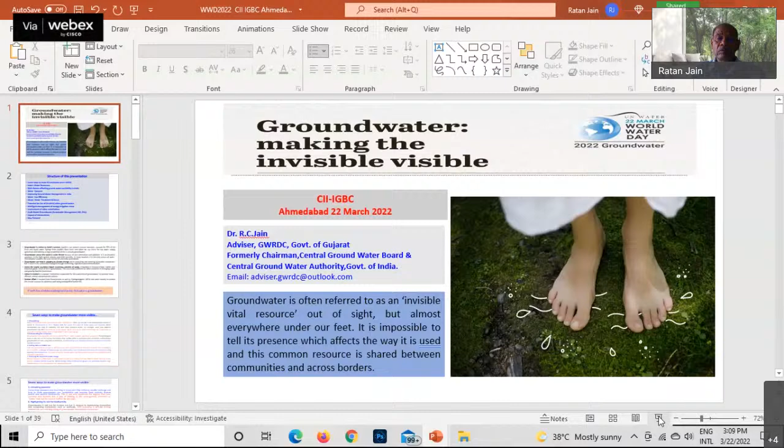Good afternoon, everyone. As already introduced by the previous speakers, I will start right now with the presentation. Groundwater is often referred to as an invisible, vital resource, out of sight but almost everywhere under our feet. As you can see in the headlining picture, it is impossible to tell its presence, which affects the way it is used, and this common resource is shared between communities and across borders.

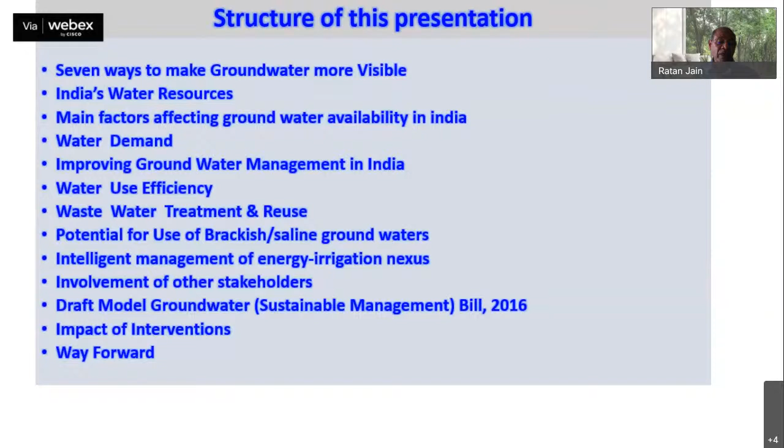The structure of my presentation is like this. I'll be sharing my insights into the following aspects: 7 ways to make groundwater more visible, India's water resources, main factors affecting groundwater availability in India, water demand, improving groundwater management, water use efficiency, wastewater treatment, potential use of brackish saline groundwater resources, intelligent management of energy-irrigation nexus, involvement of other stakeholders, the groundwater management bill, impact of the interventions, and the way forward.

As all of you know, groundwater is critical to the Earth's survival. Aquifers, our planet's natural reservoirs, account for 99% of the fresh liquid water. Springs from aquifers feed the rivers, and we use these for our water supply, with a large proportion also going to the agricultural industry.

Groundwater across the world is under threat because of over-abstraction and pollution. It is an essential supporter in the fight against poverty and child mortality. In many locations, it is the only source of water. Groundwater supports the very survival of vulnerable populations. It can help in adapting to climate change and in protecting and restoring vulnerable ecosystems, but it needs to be sustainably managed through monitoring, regulation, and communication.

Across the world, countries import enormous volumes of water embedded in imported food, clothes, and industrial goods. With much of this being groundwater, this can create problems for other countries in managing water and growing food for themselves. Action is needed to empower institutions responsible for protection of groundwater to promote more efficient, ethical, and democratic policies. Greater effort is needed from governments as well as hydrogeologists, NGOs, and wider society to protect this crucial resource for planetary well-being and dignified human life. So, if Earth has a hidden underground pulse, the pulse is groundwater.

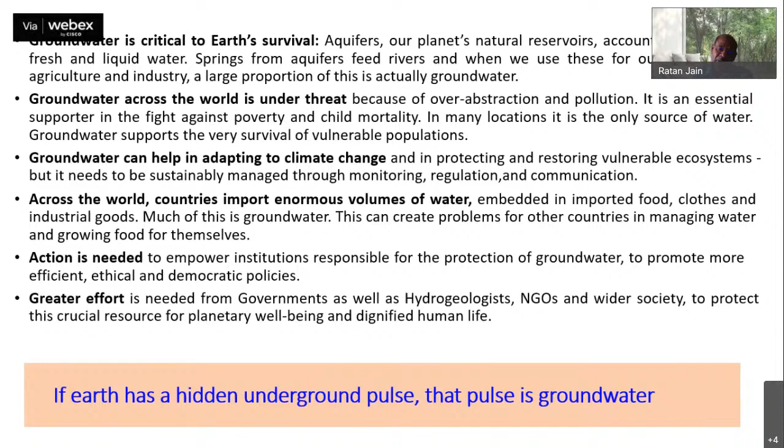As the subject of World Water Day goes, making the invisible visible means making groundwater visible. There are 7 ways to make groundwater visible. Number 1, and the most important, is demystifying. Being underground makes groundwater seem mysterious. What we can see is the infrastructure needed to extract it on the ground, but not the groundwater itself. It is not a flowing river, but water that exists in cracks, pores, and fractures of the sediments.

Better visualization can help to demystify and bust some common myths. For example, what does polluted groundwater look like? It is no different than clear water. Similarly, groundwater is not always pure and can be unfit for drinking due to the presence of naturally occurring arsenic, fluoride, nitrate, or uranium, which is impossible to see or photograph.

The second aspect is understanding the complexity, because groundwater is the resource and the aquifer is the host, both of which need to be protected. The hydrological cycle is only one of the factors that affects how quickly water is recharged after extraction. Contaminated groundwater can take a long time to remediate, and understanding such complex processes can help us value this invisible resource. Getting data on the hidden use, the lack of understanding and data on who uses how much groundwater, for what, and at which time, is missing in most countries, including India.

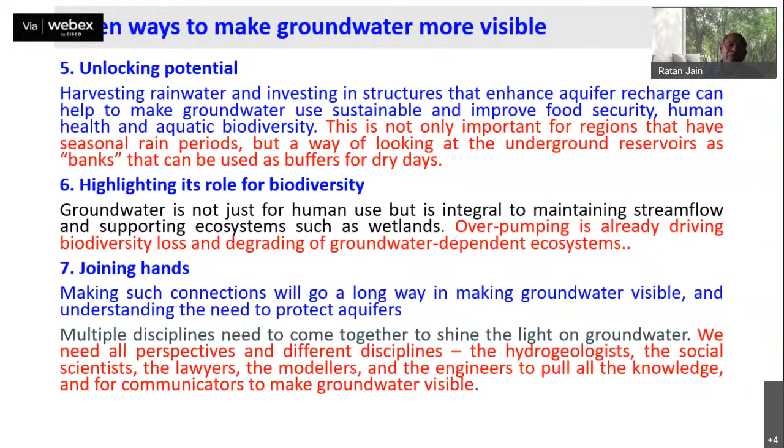Now let us have a look at the situation in India. We in India have nearly 17.5% of the global population, with only 4% of the freshwater resources of the world.

In India, we receive about 4,000 billion cubic meters of precipitation, including snowfall, but the average annual potential in the rivers and aquifers is only of the order of about 1,900 billion cubic meters. That makes less than 50% of the total precipitation received, mostly because of evaporation losses.

Out of this 1,870 BCM, the utilizable water is estimated to be around 1,120 BCM, of which surface water makes about 690 billion cubic meters and groundwater about 430 billion cubic meters.

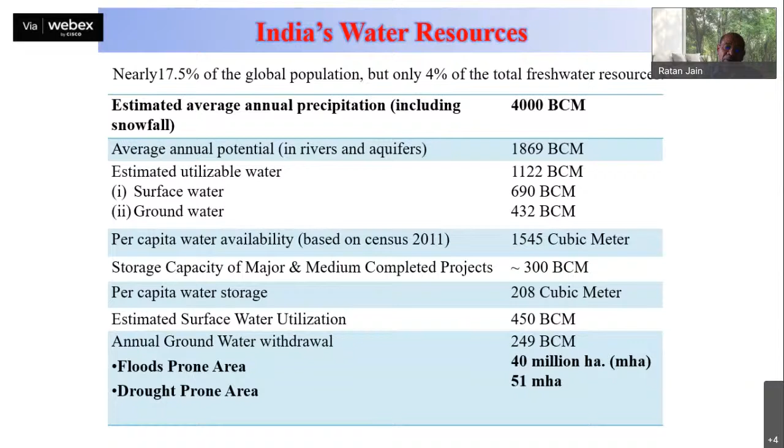The per capita availability as of 2011 was 1,545 cubic meters per capita per year, which is decreasing. The per capita water storage in the country is about 208 cubic meters per capita, with surface water and groundwater utilization being about 450 and 250 BCM respectively.

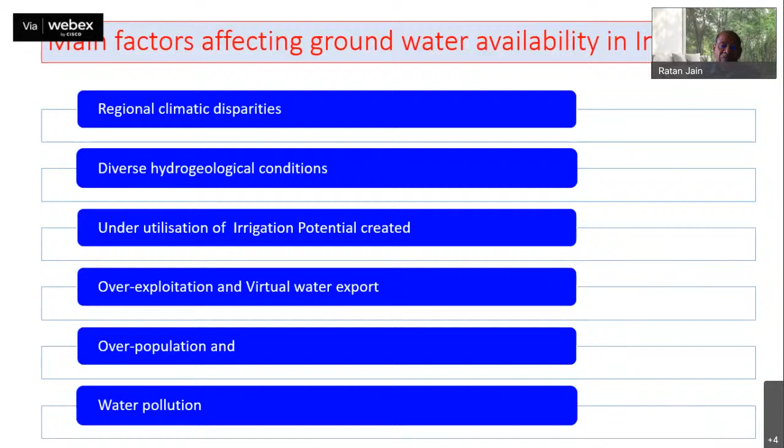Now let us look at the main factors affecting groundwater availability in India. These are regional climatic disparities, diverse hydrogeological conditions, underutilization of the irrigation potential created, overexploitation, virtual water export, overpopulation, and water pollution.

As I've already said, we are able to utilize something like 60% of the water in India because of topographic constraints and distribution effects. Further, changes in temperature and precipitation also affect regional water resources and flood risk, exacerbating regional disparities in water availability across the country.

India receives about 115 centimeters of rainfall on average, but with very spatial variations. A major part of this rainfall, nearly 75%, is received during the southwest monsoon season, confined to the 4 months June to September. Tamil Nadu mostly receives its rains during October to December, and the 3 states of Jammu & Kashmir, Himachal Pradesh, and Uttarakhand receive rainfall in all 4 seasons.

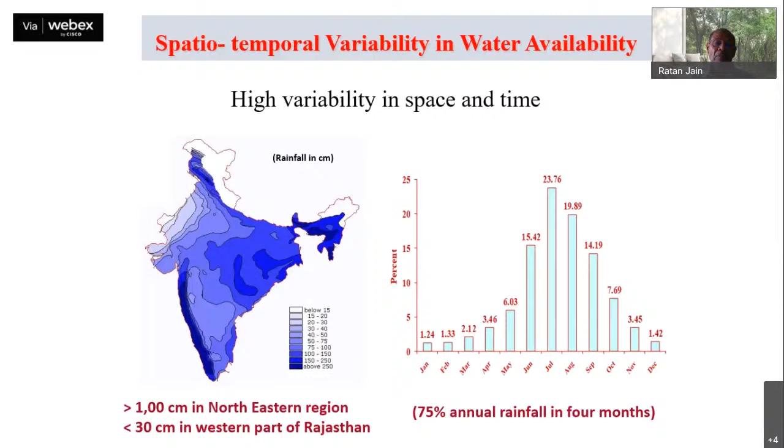Then there is diverse hydrogeological conditions. The geology is basically forming the reservoir for storage of water. The geological formations are the reservoir host rocks, and there is a lot of variation across the country. There are about 14 principal aquifer systems in India based on the major geological formations.

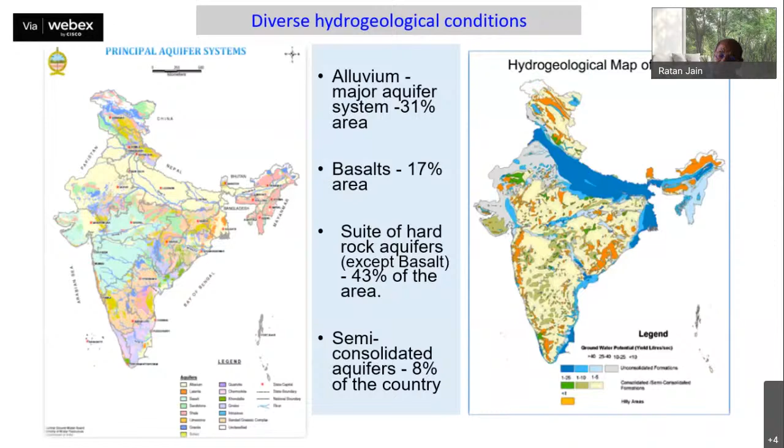The third issue is overexploitation. We are exploiting groundwater more than the combined withdrawal of United States plus China together. Our extraction is of the order of about 250 billion cubic meters per year. This overexploitation is mostly concentrated in the western and northwestern part of the country, in Punjab, Haryana, Rajasthan, where the rainfall is comparatively less, but indiscriminate withdrawal has taken place.

In the western part of the country, in Rajasthan and Gujarat, because of the arid climate, groundwater recharge itself is limited, leading to stress on resources. In the southern part of the peninsula, including parts of Karnataka, Andhra, Telangana, and Tamil Nadu, due to inherent aquifer properties of the crystalline rocks, groundwater availability is low. We have something like 20 million wells extracting groundwater with free and subsidized power supply, and about 90% of the extracted groundwater is consumed by the agriculture sector.

Looking to the distribution and stage of development in the country, this assessment has been carried out jointly by the Central Groundwater Board and the state groundwater departments. There are 6,965 administrative units in the country, also called assessment units, coterminous with the talukas or blocks of the respective states.

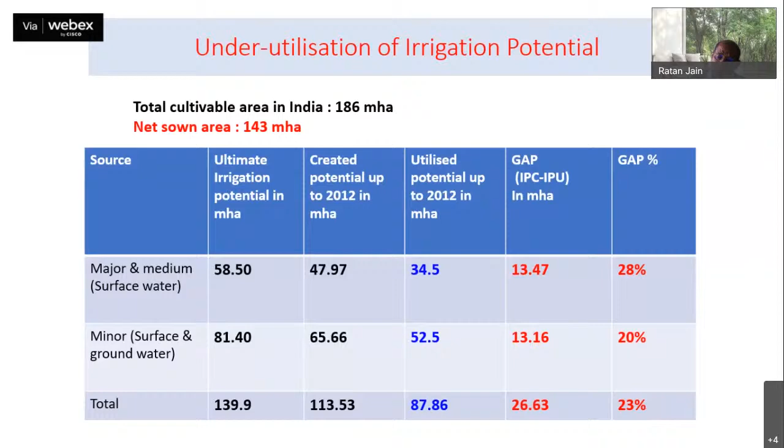Now, virtual water export is one of the very difficult things which have been happening for certain reasons. India is reportedly the top net exporter of virtual water, exporting about 100 billion cubic meters of fresh water through crops, animal and industrial products. This does not look huge, but extraction is highly localized, especially in northwestern India, through crop production. This probably also does not include water rendered unusable through contamination during production of crops and rearing of animals for industrial products. A country deficit in water resources cannot afford to export it unless the water footprint is significantly reduced.

For example, the export of rice from India. India produced about 160 million metric tons during 2018-19 and exported about 12 million metric tons. If we consider the water footprint of rice to be about 3,500 liters per kilogram, the water exported is approximately 42 billion cubic meters. The water footprint of the rice exported alone accounts for about 36% of the total groundwater extraction of the top 5 rice producing states: West Bengal, UP, AP, Punjab, and Tamil Nadu. A similar story holds true for sugar, cotton products, and cotton machinery.

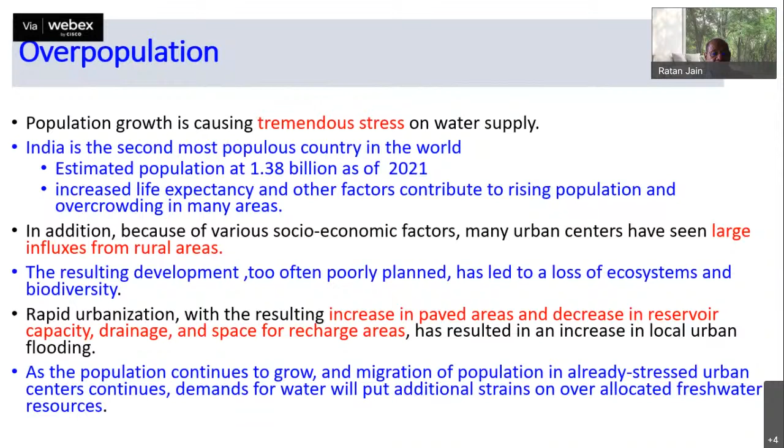The resulting development too often is poorly planned, which has led to loss of ecosystems and biodiversity. This rapid urbanization is also causing an increase in paved areas and a decrease in reservoir capacity, drainage, and space for recharge areas, ultimately resulting in an increase in local urban flooding. As population continues to grow and migration into already stressed urban centers continues, demand for water will put additional strains on the over-allocated water resources.

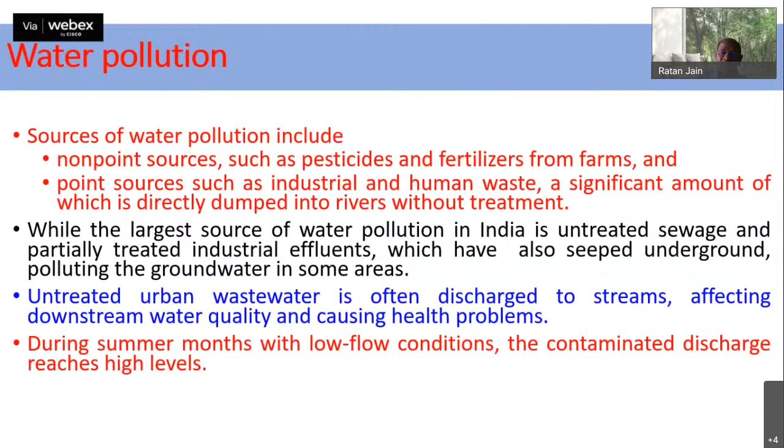Then water pollution. Water pollution is basically of two kinds: it can be classified as non-point sources, such as pesticides and fertilizers, and point sources from industries and human waste, a significant amount of which is directly dumped into rivers without treatment. The largest sources of water pollution in India are untreated sewage and industrial effluents, which have also seeped underground, causing groundwater pollution. Untreated urban wastewater is often discharged into streams, affecting downstream water quality and causing health problems. During summer months, with low flow conditions, the contaminated discharge reaches high levels.

So these are basically the factors responsible for causing shortage or scarcity of water. Now, if we look at the total water demand scenario in the country for various sectors including irrigation, drinking, industry, energy, and others, as per estimates made by the National Commission on Integrated Water Resources Development, water demand is likely to increase to 843 BCM in the year 2025 and to 1180 BCM in the year 2050, wherein we will already exceed the average annual availability of 1123 BCM in the country.

So now what can be done to improve the management, more specifically the groundwater management, in India? Presently, water management remains heavily dominated by traditional built infrastructure, that is grey infrastructure. But the enormous potential of working with nature remains underused in India. A paradigm shift is required in management approaches towards water shortage challenges in India, progressively increasing the use of nature-based solutions across all sectors, including water needed for agriculture, sustainable cities, disaster risk reduction, and water quality.

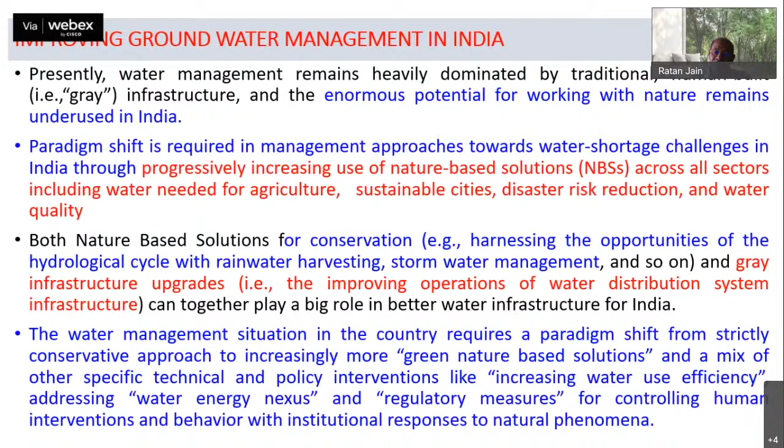So both nature-based solutions for conservation, that is harnessing opportunities of the hydrological cycle like rainwater harvesting and stormwater management, and grey infrastructure upgrades that improve the operations of water distribution system infrastructure, can together play a big role in better water infrastructure for India. The water management situation in the country requires a paradigm shift from a strictly conservative approach of grey infrastructure creation to increasingly more green, nature-based solutions, along with a mix of other specific technical and policy interventions, like increasing water use efficiency, addressing the water-energy nexus, and regulatory measures for controlling interventions and behavior with institutional responses to natural phenomena: the nature-based solution for water security and resilience.

This has gained a lot of significance during the last few years, and the dialogue on water and environment has significantly shifted, in which the environment cannot only be conserved but managed to meet human needs sustainably, with a focus on working with nature to produce co-benefits for both people and nature. In this dialogue, nature-based solutions for water have contributed importantly.

The option of building more surface water reservoirs is increasingly limited by uncertain precipitation, reservoir siltation, environmental concerns, and the fact that most of the cost-effective and viable sites have already been used up. In addition, increasing temperature also leads to increased water losses through evaporation.

So as part of this shift, groundwater and the subsurface environments that contain it, that is the aquifers, are increasingly seen as strategic and integral resources for enhancing water supplies and other natural ecosystem services that support human development and resilience. Hence it is increasingly important to enhance, manage, and sustain services derived from the nature-based infrastructure of aquifers through managed aquifer recharge, by managing and optimizing underground water storage towards resilience in dry periods or seasons of uncertain and variable climate.

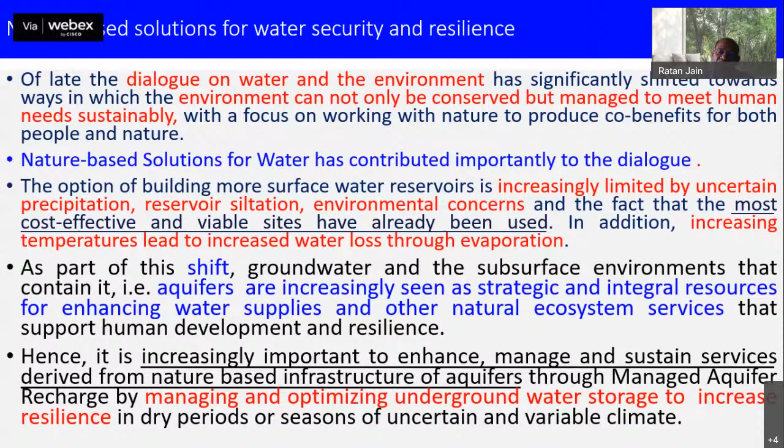The green infrastructure approach uses natural processes to enhance water availability. There is soil moisture retention, artificial groundwater recharge, improved water quality through natural and constructed wetlands, riparian buffer strips, and reduced risks associated with water-related disasters and climate change. For example, floodplain restoration, green roofs, etc.

The green infrastructure expands the low-impact development approach to a larger community scale and presents similar sustainable opportunities to local government and user projects for implementation at the lower levels of administration as well. To develop a sustainable water supply chain in India, the green infrastructure approach can substitute, augment, or work in parallel with grey infrastructure in a cost-effective manner.

So both the nature-based solutions for conservation, harnessing the opportunities of the hydrological cycle, rainwater harvesting, storm management, etc., and grey infrastructure upgrades, improving operations of water distribution infrastructure, can together play a big role in better water infrastructure for India. The nature-based solutions mainly address water supply through managing precipitation, humidity, storage, infiltration, and transmission, so that improvements are made in the location and quantity of water available for human needs.

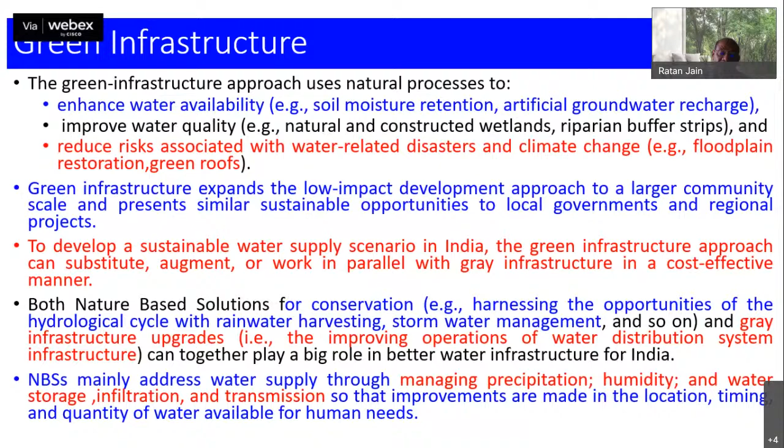To look at the opportunity of managed aquifer recharge, the Central Groundwater Board has carried out studies to demarcate areas suitable for artificial recharge in the country. That is, those areas where the depth of water level is more than 3 to 8 meters below ground level, with a declining trend of water level over the last few years, and areas with water quality deterioration.

About 11 lakh square kilometers of area has been identified in the country, and about 185 BCM of non-committed surplus water has also been estimated as available for recharge. Recharging this water can augment our groundwater resources by 130 million cubic meters at an estimated cost of 1,33,145 lakh rupees, that is crores of rupees.

The grey infrastructure exists as the management practices for irrigation projects. So the most important thing is to close the gap between irrigation potential created and utilized, through farmer participatory command area development work.

This can be done through aggressive promotion of participatory irrigation management through water users' associations at the outlet and distributory level. But we need to establish a minimum irrigation service fee at a reasonable level, and at least 50% of that should be provided to the WUAs for maintenance and distribution of the system. In addition, enhancing the resources available to major and medium irrigation departments for improving operation and maintenance of irrigation systems.

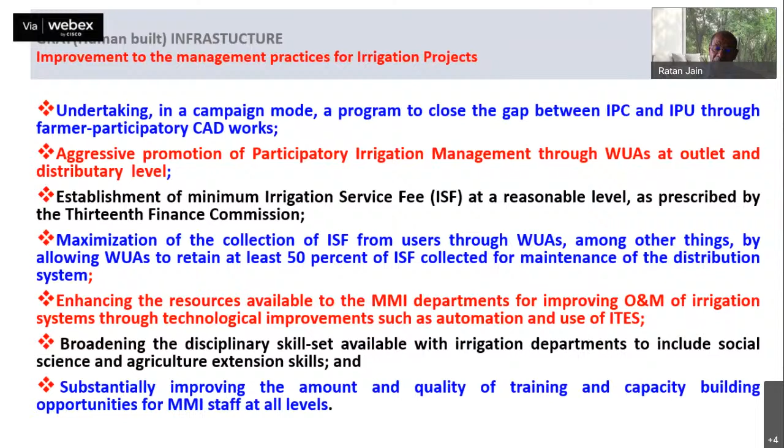Now if you look at water use efficiency, this table shows how much efficiency is achievable and how much is the present level of efficiency. In case of irrigation, the present level of efficiency is about 30%, while fully achievable is around 60%. So there is scope to increase efficiency by another 30%, or rather 100% of the current 30%. The quantum of water likely to be saved at full efficiency level will be about 100 billion cubic meters. If we are able to increase efficiency only by 20%, then also we save something like 70 BCM of water.

Same case with groundwater: the efficiency is about 55%, but we can achieve up to 75%. There is a scope for 20% increase, providing about 45 BCM of additional water resources.

In the drinking water sector also, about 10 BCM can be saved and the efficiency can be increased from 60 to 90%. In case of rural water supply also, it is possible to increase efficiency. So we can see that if water use efficiency in India is increased to the fully achievable level, we are able to generate another 166 BCM of water from the waters already utilized. And if we are able to achieve only a 20% increase, we are able to save 130 BCM of water, which is adequate to meet irrigation and drinking water requirements up to the year 2050.

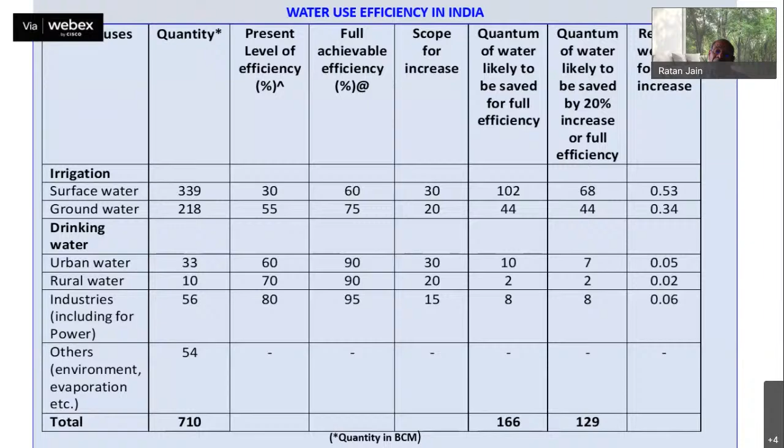Now, why do we talk of water use efficiency in the irrigation sector? Because we consume nearly 90% of all the groundwater found in the country for agriculture, and also about 50% of the canal water supplies. Traditional irrigation techniques like flooding the fields result in water losses from evaporation, drainage, percolation, conveyance, and excessive use. Potential solutions include educating farmers on best practices of micro and drip irrigation and precision irrigation. This will help save anything between 30 to 40% of the water resources applied for irrigation. For example, with a 10% increase in water use efficiency in irrigation projects, an additional 14 million hectares can be brought under irrigation from existing capacity.

As per the estimates of the Central Water Commission, National Water Mission, about 112 BCM of water could be saved by a 20% increase in efficiency, and there could be additional demand for irrigated agriculture, as I said, up to the year 2050.

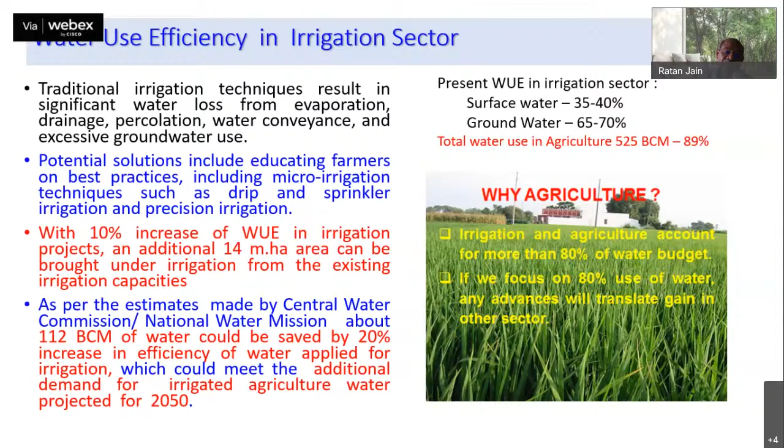Then non-revenue water. This is also a very severe constraint on water resources, and a lot of saving is possible. The amount of non-revenue water is high in India for several reasons, including advanced system age, poor maintenance, illegal connections, leakages, and lack of proper mapping. The average non-revenue water in India is almost 32%. In some Indian cities, it makes up even 50% of the water produced. The major determinants of water utility's successful performance are mainly the lack of meter connections and the extent of distribution networks with inadequate pumping facilities.

It is estimated that a typical Indian water utility has the potential to improve water pumping system efficiency by 25%, thereby increasing supply reliability. Further, better water accounting would support more economically viable water markets for an already stressed water sector, and to this end, the creation of a robust water accounting framework is integral to better water policies for India. By contrast, policies such as providing free electricity to farmers or financial support for groundwater extraction have resulted in uncontrolled exploitation and waste of water resources.

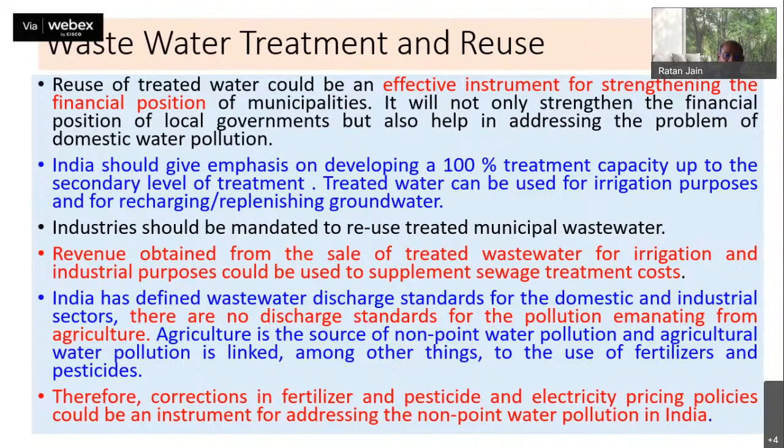India has not defined discharge standards for pollution emanating from agriculture, so that also needs to be defined. Corrections in fertilizer, pesticide, and electricity pricing would be an instrument for addressing non-point water pollution in India.

Then we have huge water resources of brackish and saline groundwater of 1164 BCM in Haryana, Punjab, Delhi, Rajasthan, Gujarat, Uttar Pradesh, Karnataka, and Tamil Nadu. This water can be utilized for many salt tolerant varieties of crops, vegetables, and fruit plants like barley, dates, and pomegranate. When these crops are irrigated with saline or brackish water, the yields are not significantly affected.

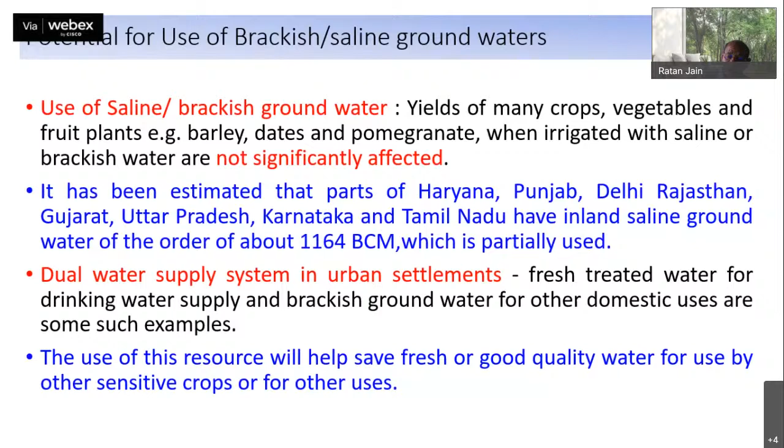Similarly, dual water supply systems can be introduced in settlements, wherein we can provide fresh treated water for drinking purposes only and brackish groundwater for other domestic uses like toilet flushing, wash basins, and providing water for lawns, etc. The use of this resource will help save fresh or good quality water for use by other sensitive crops or for other purposes.

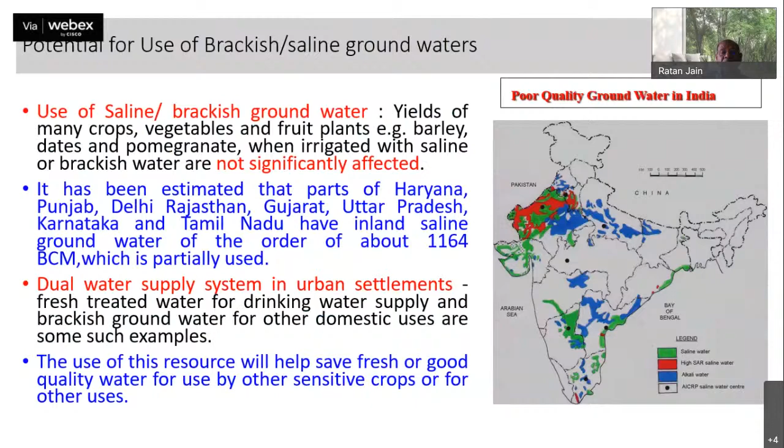This map shows basically the distribution of the poor quality groundwater areas in the country. Then, intelligent management of the energy-irrigation nexus can be one of the principal tools of groundwater demand management.

Tariff reform has proved a political challenge in many states, but other hybrid solutions need to be invented. Like Gujarat has invented the solution of Jyoti Gram, where they have separated the feeder lines for irrigation electricity and domestic water supply. The electric supply in the feeder for irrigation is limited to 8 hours in 24, while the domestic feeder gets 24 hours of electricity supply. As a result, we have been able to curtail the groundwater pumping basically for irrigation purposes.

But in other states in the country, we are also moving in the direction of demand management by rationing power, like Punjab, which is effectively using stringent power rationing in summer to encourage farmers to delay rice transplantation by a month, significantly reducing their groundwater depletion. Andhra Pradesh, which used to give farmers free power, has now restricted power timings to 7 hours in 24. Haryana has introduced higher MSP for less water-intensive crops, thus reducing electricity demand as well as groundwater depletion.

Then, there is a need for involving other stakeholders as well. Water management should not be perceived as the sole responsibility of the Ministry of Jal Shakti, Government of India, and water resources departments of the states anymore. We need to make water everybody's business in the true sense through involvement of all stakeholders.

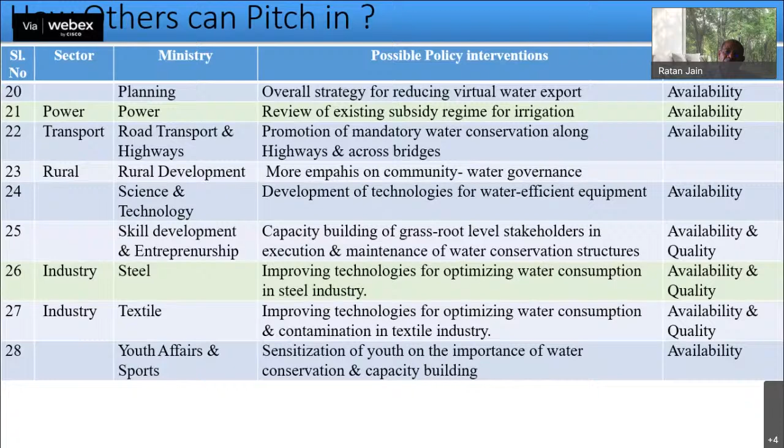The steel industry should focus on improving technology for optimizing water consumption, and the textile industry likewise for optimizing water consumption and reducing contamination. So these are the various players who can possibly pitch in and provide a better strategy for water management in the country. Then we have the regulatory framework also.

The Government of India has introduced the Model Bill 2016 for sustainable management, asking states to enact the same for groundwater regulation. So far, about 18 states in the country have enacted this.

The beauty of this bill is groundwater is treated as a common resource and a common heritage of the people held in public trust, not as property of the state, community, or persons. It follows the principle of subsidiarity, ensuring participation of the lowest level functionary in decision making, and ensures that the overwhelming majority of small farmers will have water available for their crops, resulting in effective regulation of large scale groundwater use. It is built on the holistic principle of sustainability, including surface and groundwater, to meet the basic needs of every person. The bill recognizes that groundwater is perhaps the most important resource governing India's future economic development and life and livelihood security for the Indian people.

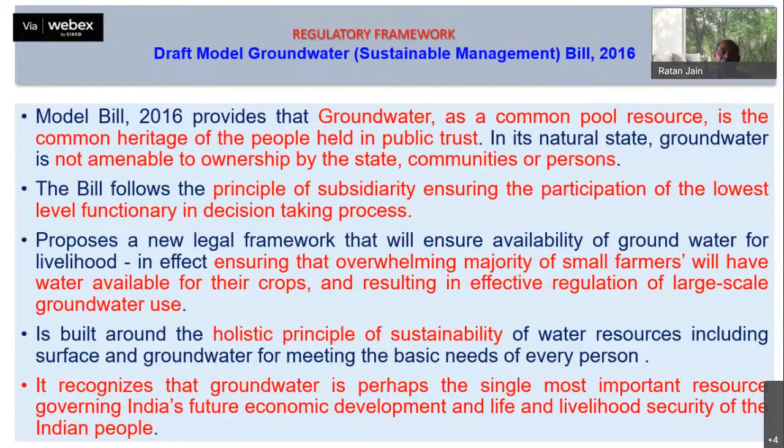Now, what is going to happen with these interventions which I have proposed? Something like 300 BCM of fresh water will be saved through efficient water management and nature-based green infrastructure. We are going to generate additional...

Dr. Jain, how many more slides do you have? How much more time do you require? Sorry, 2 or 3 slides. You have maybe another 5 minutes, so please go fast. Yes, it will be wound up in the next 5 minutes.

Okay, thank you. Then the regulatory framework and capacity building will also be very useful. So the way forward is closing the huge gap between irrigation potential created and irrigation potential utilized, because it is also a low hanging fruit which can be picked by investing in canal area development works, ERM projects, and irrigation management reforms. Then aggressive promotion and incentivization of sprinkler and drip irrigation systems.

More specifically in critical areas, this can form the most important demand side management strategy to overcome overconsumption. Managed aquifer recharge, intelligent management of energy-irrigation nexus, and participatory groundwater management offer a major opportunity for a water secure and resilient India.

The managed aquifer recharge is the most economic, most benign, most resilient, and most socially acceptable solution. But has not been given due importance in the past is due to lack of awareness, inadequate knowledge of aquifers, immature perception of risks, and inadequate policies for integrated water management, including linking MAR with demand management.

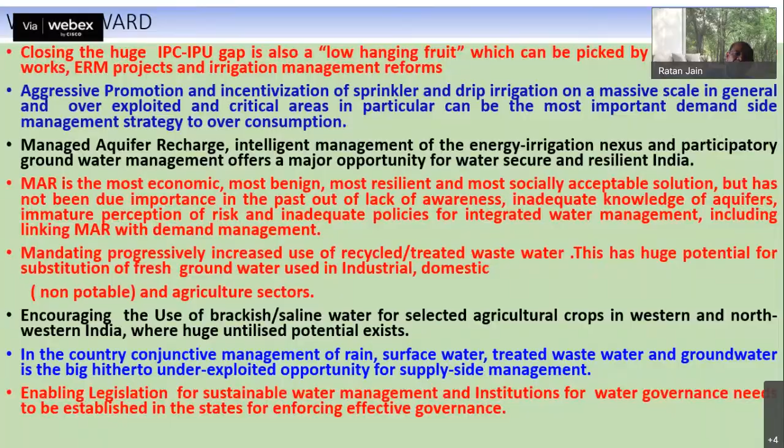So what is needed is a change in perspective. Groundwater offers a climate resilient freshwater source and an alternative for drought proofing. Evidently, abstraction of groundwater cannot ignore the limits defined by nature. Its exploitation and management requires a paradigm change in our approach to ensure sustainability, and there is an urgent need to adopt balanced supply and demand side interventions. Thank you.

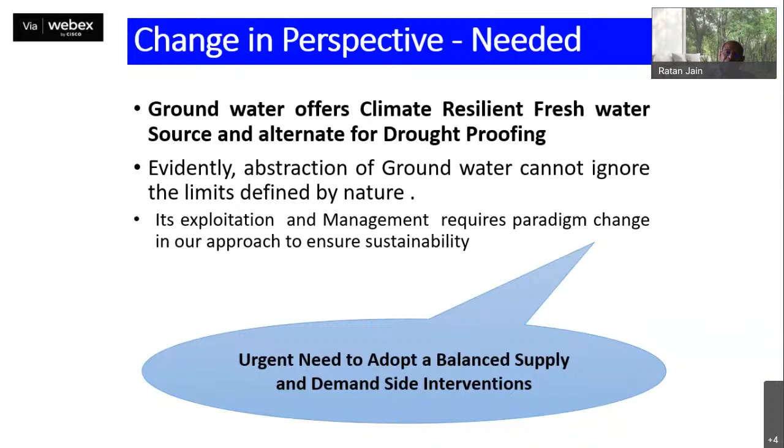Thank you very much, Dr. Jain. Okay, wonderful insight about all water-related issues, from source to the challenges we are facing, to some of the ways we can improve, and even the stakeholders that can join hands to work on this biggest concern that we face today.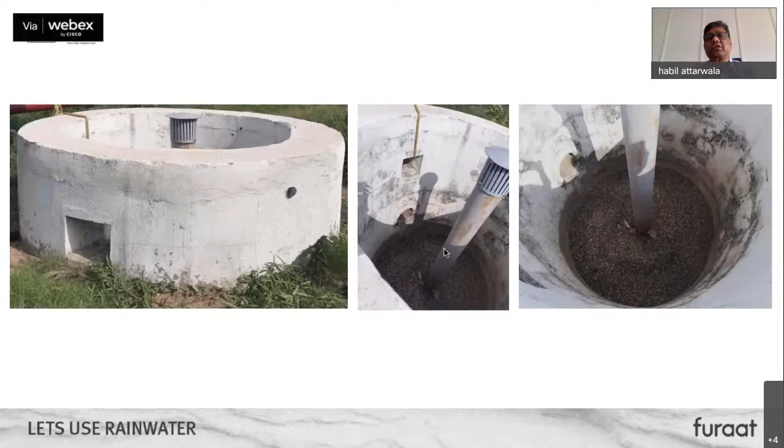So you see all these structures - look at the screen, how accessible it is. It's not accessible. So what we do is start from the maintenance part, and then develop the product. All our products are developed through research and site study of the area, particular places where clients face problems. The major problem they face is maintenance.

Taking that forward, just to give a glimpse of our company and what we are doing.

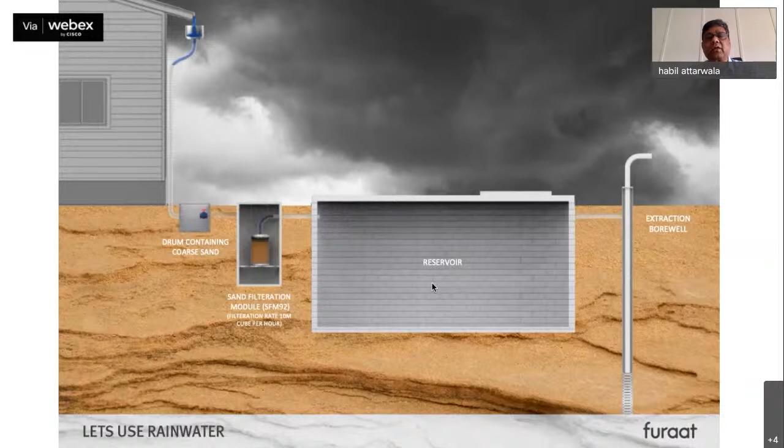What normally is the easiest way to do it, if rooftop water is there, you can just filter it by gravity and fill your underground tank. So you don't need to make an underground tank everywhere. Whatever reservoir is there with you, whether it is 5,000, 50,000, or 5 lakh liters, you can just connect your overhead lines smartly with filters connected to it, and the overflow can go into your existing borewell. So in this, no power is required, nothing is required, and the fresh water which is coming from the roof can be tapped smartly and reused during the monsoon time.

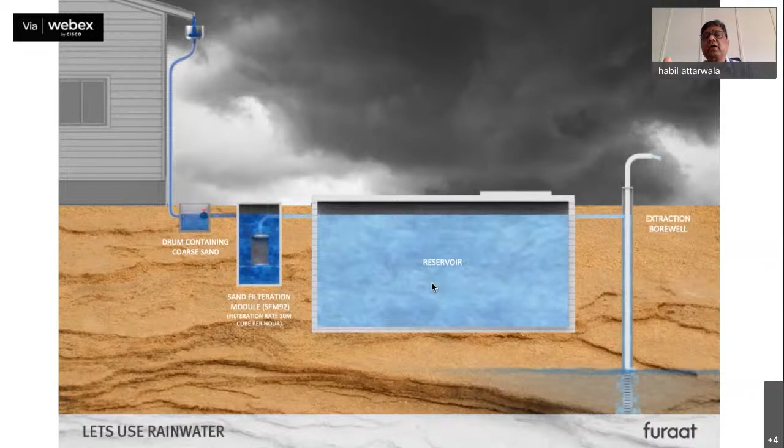And in India, some places have high precipitation, like Bangalore and up in the northeast, so they get a lot of water throughout the year. They can use this good quality, low TDS water throughout the year. And in some places like Gujarat, where we have a monsoon of 2 to 3 months, during that time also, if you use this, because if we have a large roof area, we can convert all this good rainwater into a possibility of saving a lot of water.

Because here you don't need to pump it from underground, the highly high TDS water which you need to process for another process, you don't need to do that. By just basic filtration, you can reuse that water for your secondary process or even for your production. So there are many ways of doing it.

At some places, people have overhead tanks in their factory. At some places near the coastal areas, it's a little difficult to have an underground tank. So they have an above-the-ground tank available, or maybe they put a Sintex tank above the ground. So what we do is we give an intermediate space, and we have a sensor pump which fills up the overhead tank. These are all simple possibilities which don't need much infrastructural change.

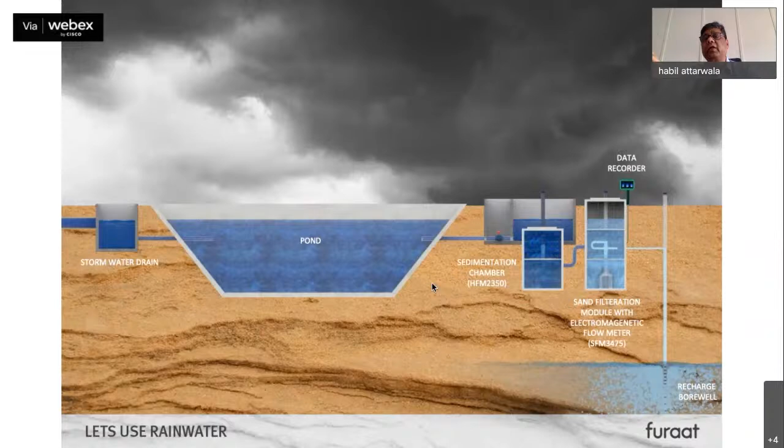So in this, you will see that if you are filling a pond, a lot of contamination and sediments come in. So prior to that, if you filter it, you can fill your pond or reservoir without much sedimentation, because otherwise your footprint is lost. After a year, you will have 600mm to 700mm of sediment in your pond. And if you have a 40 lakh or 30 lakh liter pond, your 10 lakh to 12 lakh liters is gone. Within 2-3 years, you can't use that pond, and it's very difficult to clean all these structures.

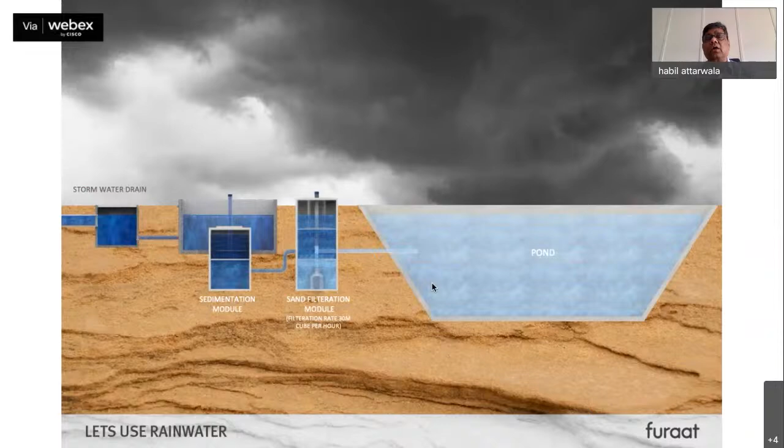So how did we do it? Because we have installed more than 15,000 units, we have worked on more than 500 projects across India and Mauritius. So 16 or 17 years before, we started developing a product which can be easily transportable and easily installed.

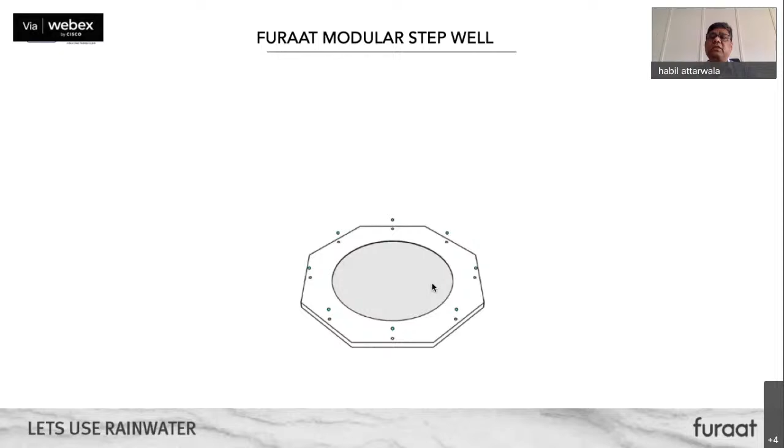So we designed a product of precast concrete, which I showed you in the earlier video also, which has two elements: one horizontal and one vertical. We have designed it in such a way that all the parts, the heaviest part is 55 kg. So we don't need any mechanical device on the site.

Our local trained installer goes to the site, whether it is in Doom Dooma or down in South India. He goes there, and we hire local unskilled laborers over there. They will just help him, and we create a well over there, basically a casing which normally people do. So here we have a standardized product.

It is of precast concrete, M30 grade, and you see the cross section of it. Every 1 meter there is one step, so it becomes a layer to put my filters also. Otherwise, if it is a capsule, you don't have that, so you put all the gravels and different kinds of filter layers on each other.

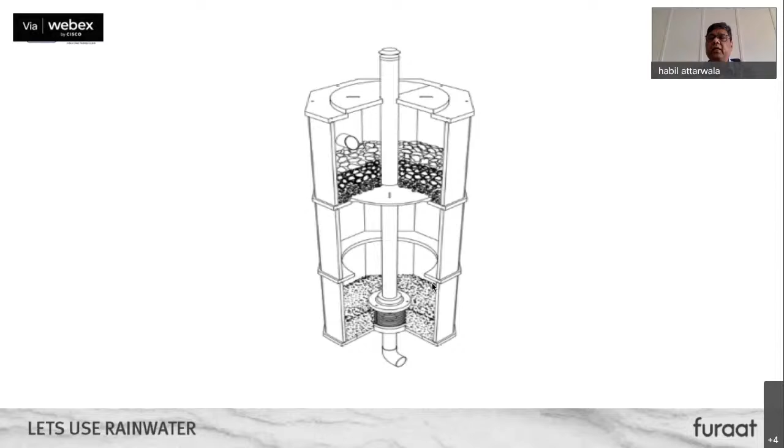If you want to remove it, there are no layers needed to get it up. In this condition, every 1 meter, a person can stand and lift a bucket. Inside, if you see the structure, it is fair face concrete, and every 1 meter there is a step.

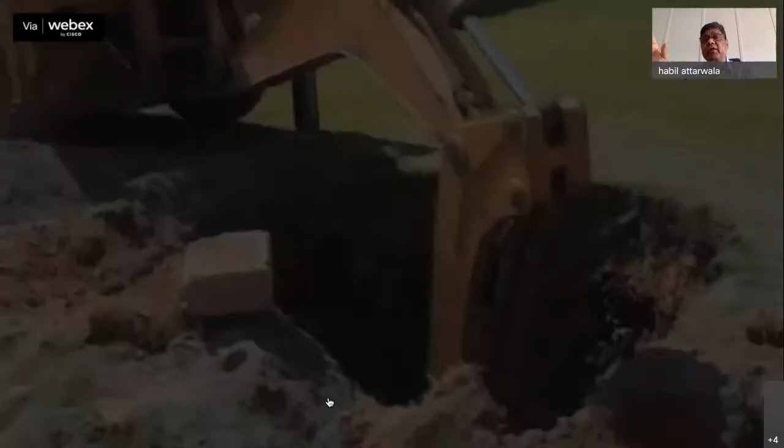It is very easy to install also. This is how we make more numbers in short time, suppose if any structure has to be created in 50 numbers or 100 numbers.

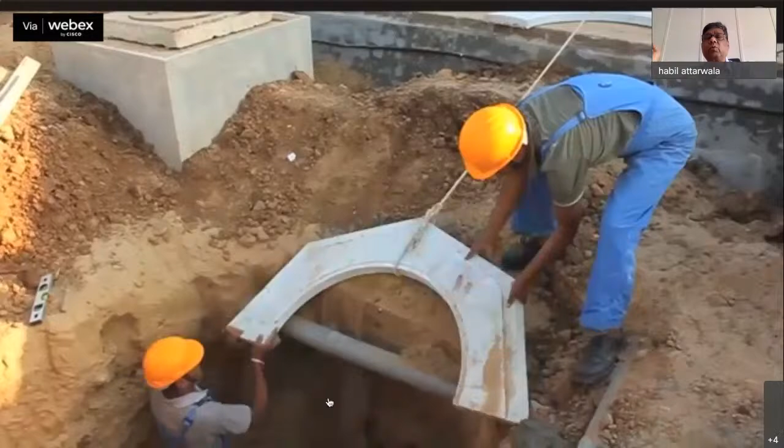So we have done a couple of projects like Dahod Smart City and Gandhinagar Smart City in record time. We did 125 locations in Dahod Smart City before the tender time limit, we finished it up. Similarly with Gandhinagar, and we are mostly connected with the corporate world, so recently we completed Nestle India and such projects.

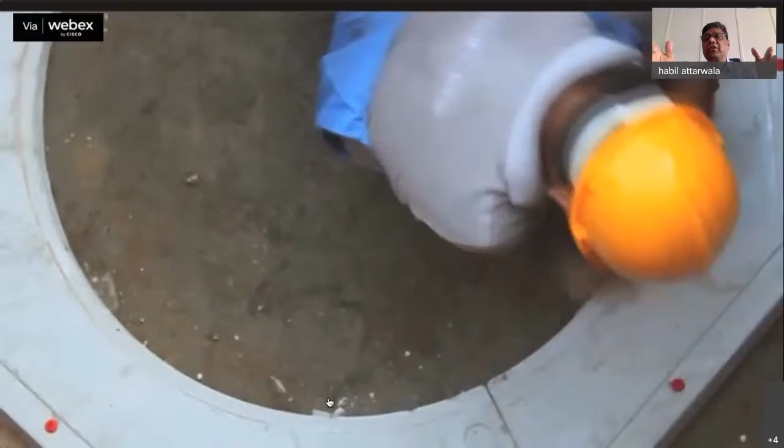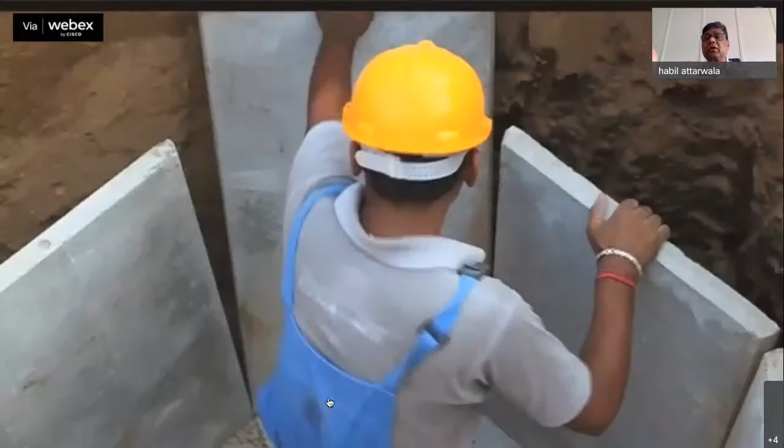What they need is a consistent standard product which gives functionality throughout the time, and it is maintainable. As a part of our company, we take the maintenance for the future also. Like in Dahod Smart City, we are going to maintain it for 5 years, and we are confident of our design that we will be able to maintain it for coming years.

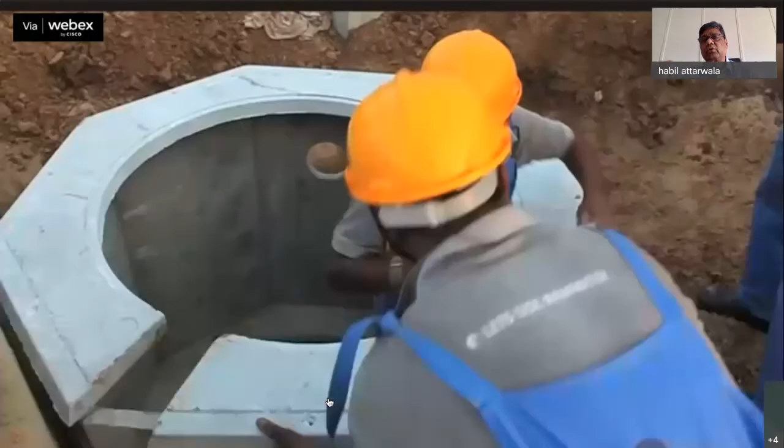So all the units I'm going to show you, we have different products for different environments. This was the first product we designed, and it is patented. You see the person handling it is alone handling the whole thing, and 2 to 3 laborers are just helping him out. There is no nut bolt in the product, it's on dead weight, and all the molds are CNC and turret punch work we have done.

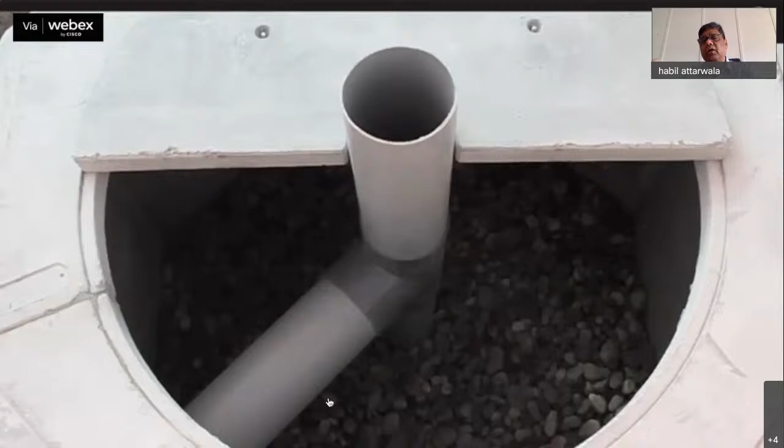So we have a layer of sand in the bottom, then we can put gravels over here. Through the time, we have learned and eliminated a couple of filter media also, because the logistics and everything was not working in favor of a sustainable thing.

So if you see this, earlier in this unit, which is a primary unit, we had 1.5 tons of gravel in the upper unit. But now we have eliminated it because we came to understand that 1.5 tons of gravel along with my system supplied to the Doom Dooma side of Unilever would cost them double - the 2,000 rupee gravel would cost 7,000 rupees, because I'm paying 5,000 rupees a ton for transportation. So we felt it is not a sustainable thing, because to pay double the price of the product is not logical.

So we redesigned the whole product within that case, and now we have array filters. The water from the outside storm drain comes here, goes down, comes up through the pressure, and goes into the array filters, then into the secondary filter. This is the sand filtration unit.

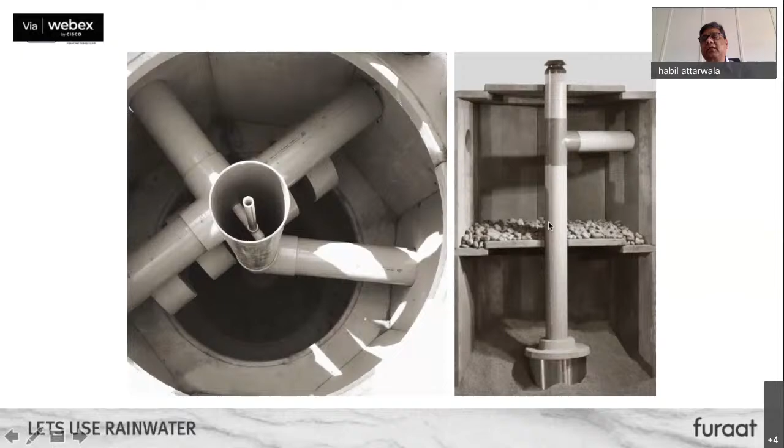This unit has sand in the bottom, so all the water will flow from the top, then it will rise in this pipe and go out. If you see this video, the whole process has been explained.

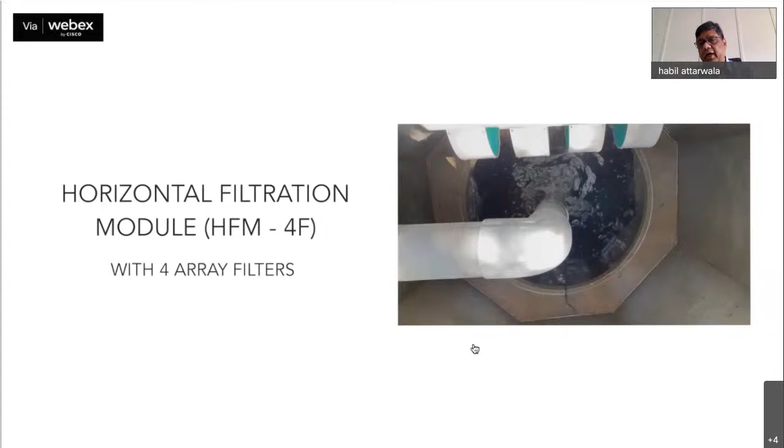The water is coming from the storm drain, where we have a stainless steel leaf trap, so all the leaves and everything are arrested. The water coming from the storm drain goes down first, then comes up, so all the heavy particles are restricted down.

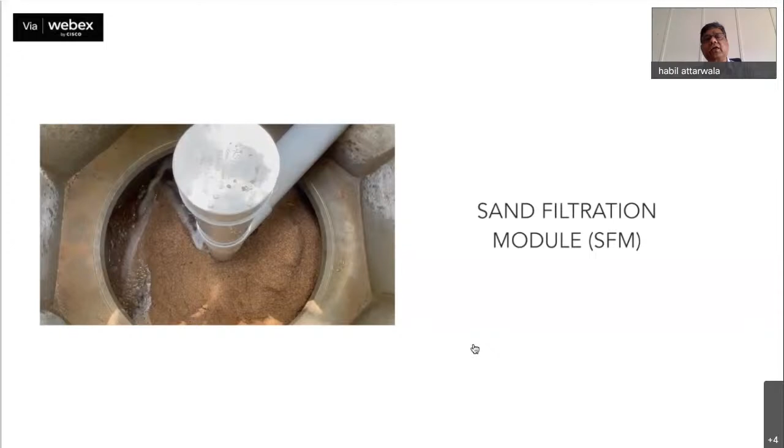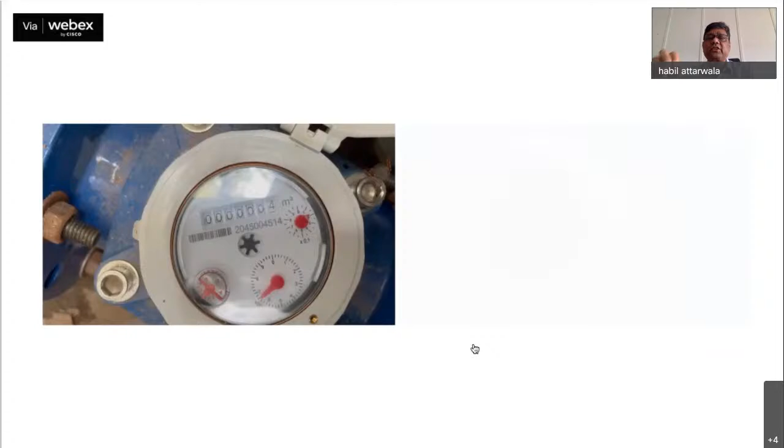From there, it comes from the secondary filter. Here you see the water coming out, it doesn't have any heavy particles, and after that it goes into the borewell. When it goes into the borewell shaft, it is clean, sediment-free water.

And we can have an arrangement of flow meter fixed in our systems, so that people can measure how much they are recharging.

As you see, all our units are not hidden somewhere. In all the factories or anywhere you go, it is a very well designed product, so they don't feel like hiding it, and it is presentable also. Why hide it? If you are hiding this product, the next generation will not know what rainwater harvesting is.

If it is there in your landscape area, in your garden or somewhere else, people will ask, and the next generation will know about it, and they will have the sensitivity of recharging or harvesting the water.

The earlier product I showed you has a filtration rate of 30,000 liters per hour. Then we came to know that in some parts of India, the recharge rate is not that high, it's hardly 5,000 to 10,000 liters per hour. So we designed a new product, which is a simple slab of about 5 feet that a person can just install, with two cylindrical filters in it.

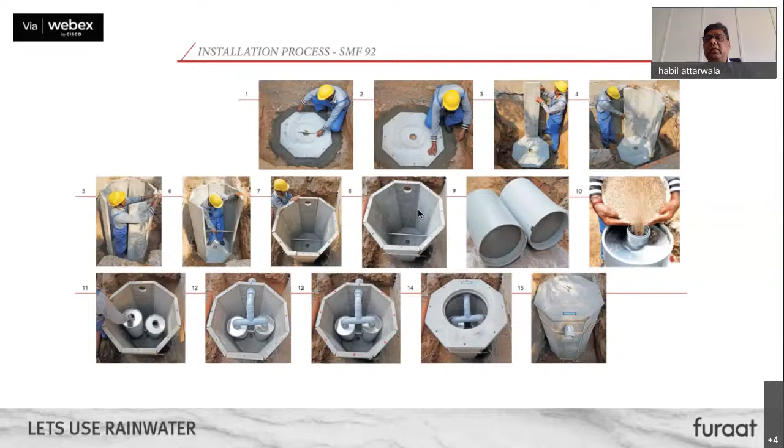The best thing is both filter cylinders can be lifted out, the sand removed, washed, and put back. Within half an hour to an hour, the whole unit can be serviced. So you don't even need our help for this unit - we just train the client and give them the literature, and they clean it themselves.

So you see here, two filters are there. The water rises from this cylinder and comes out from here. Here we've given a handle, and all these parts are removable, not fixed with glue, so it can come out and you can refix it within the system.

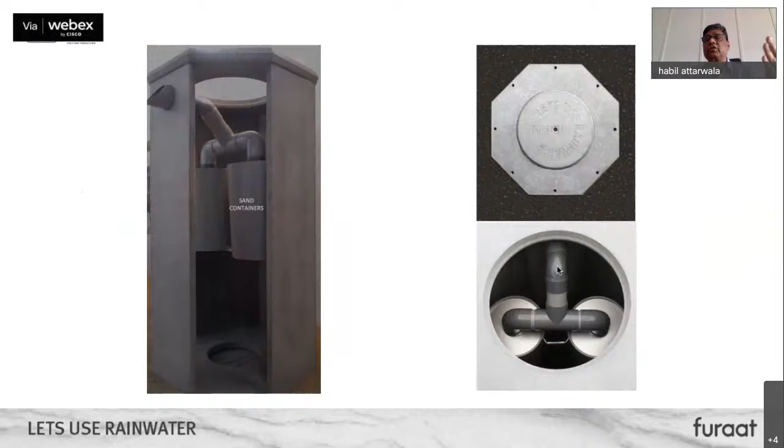So all the modules we make, we take care that they are easily maintainable from the user end. Because if it is very complicated, then it's not possible for the client or user in a far-flung area to keep it functional.

Similarly, we just introduced a precast product - again we are into precast only. This is a pedestal kind of product, you don't need to dig anything, it fits into your duct. The size is just 2 feet by 1 feet. So imagine your downtake pipe is coming, we have given an inlet of 110 mm, a 4-inch pipe, and we have taken all the care needed.

So this is the first flush - you open this up, so your first flush is done, then you close this and the water will go inside. There's an SS316 filter inside, I'll show you in the next slide. And we have given the option of 2 outlets, from the side and from the bottom also, so you can use either.

And in certain places, your borewell or tank gets overflowed, so the water will not go in, and your rooftop should not be flooded. So here we have given an overflow, it will overflow from the side.

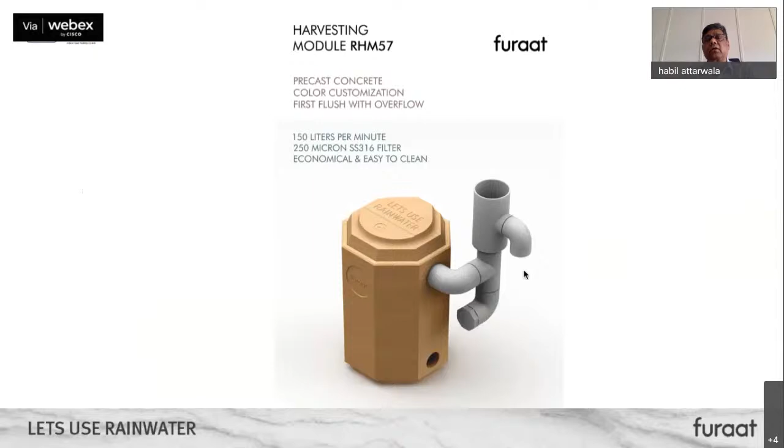So if you see here, this is exactly the rainwater gutter, the water coming from down, it's connected with my system. And this is the first flush, and this is the overflow. You can connect it with your regular drain and take it out.

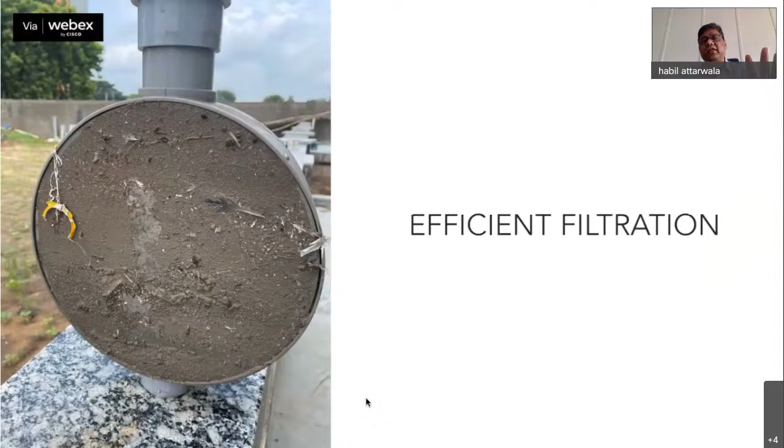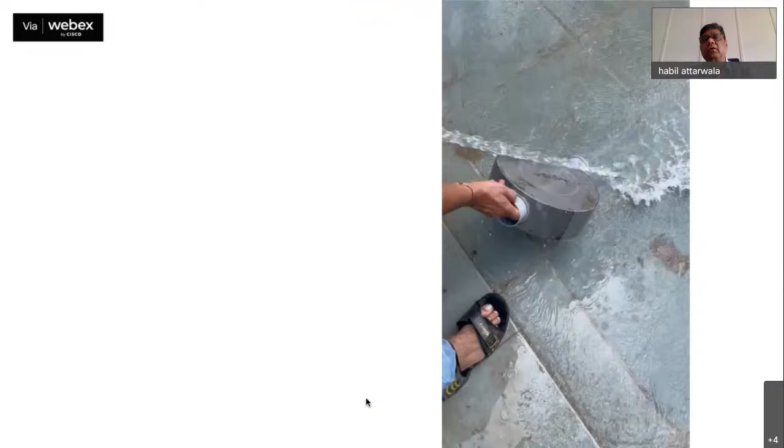And for maintenance, it's a simple thing. If you see, this is the capacity of one filter to capture sediment, and how easy it is to clean it. It's SS316, 250 microns, so it's capturing almost all the sediments coming from the roof.

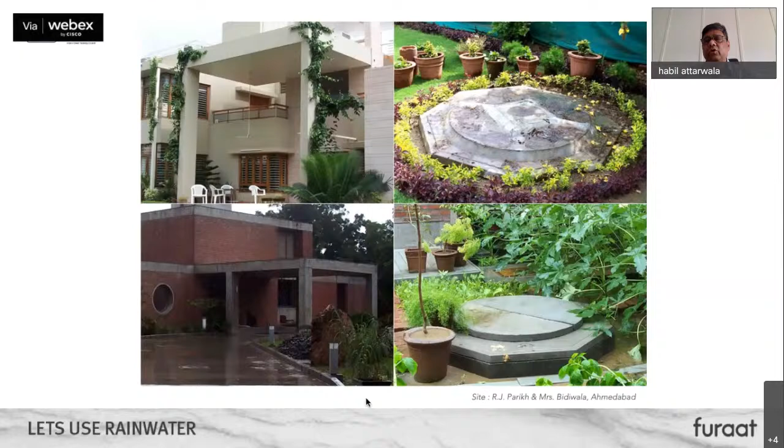And if you see, a couple of sites we've done over the years - these are very prominent people in Ahmedabad. They have an underground tank, and they just pass the water through a UV system like AquaGuard, not RO or anything, and they are using it for drinking. Earlier we didn't have any smaller version, so this bigger unit was installed there.

This is the Honda scooter factory - we did the entire factory, and we were on board when they were planning the rainwater harvesting. It's a very prominent project near Mehsana, and now we are going for the second phase also, so we will be doing more in the future.

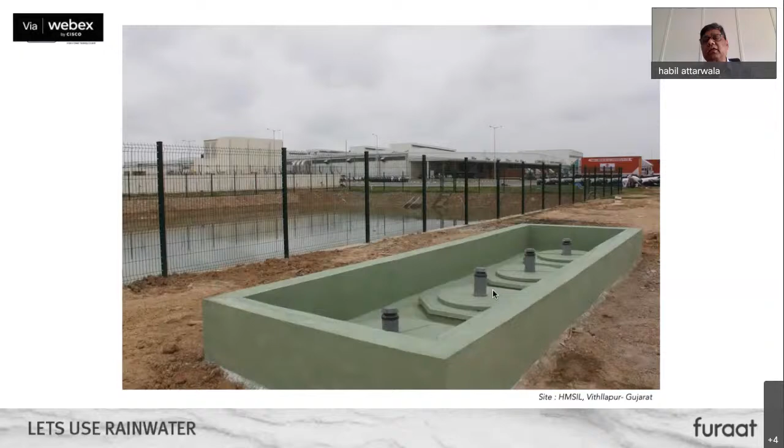So here we have done 32 locations of recharge borewell, and 4 locations which are ponds. All the excess water goes into the pond, and all these units have an interconnection. It is set in such a way that the overflow goes through the filters, and there are borewells on the side which are connected. So we have flexibility in doing it, and you can see it is a clean and neat structure, presentable even for visitors, and it is part of the whole architecture.

Similarly, this is Unilever in Doom Dooma. The first project we did was almost in 2010. They just bought 2 units from us, which is 30 meter cube per hour, and we told them that if you don't want to recharge it, you can reuse it. So they started with 2 units, and right now they must be having more than 30 units, and they are saving more than 2 crore liters of water per year.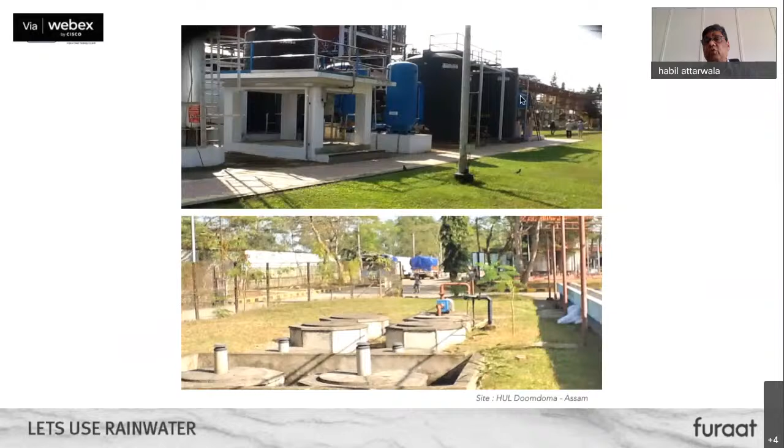In Doomdoma they have rains almost every week or 10 days, and they fill this tank through the pump, and they are reusing it for all secondary use, and they are making cosmetics. They have a requirement of fresh water, so they use this low TDS water, processing it for their regular requirement and using it for multiple processes. They are saving a lot of water, and they have got a lot of awards for it.

Similarly, I have shown you the animation of filling the pond. So this is the Mars chocolate project. They also called us for making a recharge bore, but when we went there and studied the area, it is a hard rock zone near Pune. We suggested to them that if you make the recharge bore, it will be a waste of money, because you will get hardly any percolation rate over there, and you won't be benefited as much.

So why don't you reuse this water? And they had those kind of contours. Because we were involved at a very initial stage, they made sure they built 2 such big ponds - one is 40 lakh liter and another is 25 lakh liter.

So all the water which is flowing from the surface of the factory gets filtered over here, and all the sediments get arrested over here. There are 10 units over here, and at 3 lakh liter per hour they are filling the tank, this reservoir.

If you see, the person is just scrubbing with a normal rubber scrubber. That much sediment is there - it could be an atmospheric thing also. So they don't need to clean with a JCB or anything like that. After 2 days of scrubbing and everything, it is ready for the next monsoon. So this way they are using rainwater for all their secondary use over there.

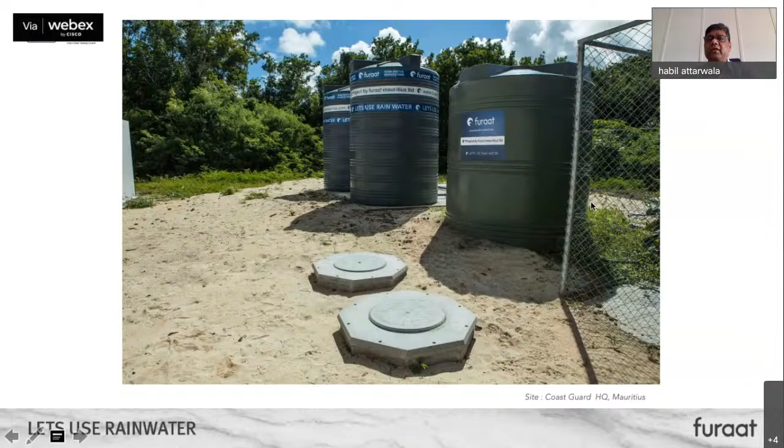Similarly, we have done a couple of schools over there. This is also one of the Mauritius projects. But there is a limitation - you are not allowed to make a recharge bore, and also there is no such equipment available over there. So the only thing we can do is reuse it. We have done many such projects, almost 20 plus projects in Mauritius, and we have a couple of projects lined up to be done in the future.

Similarly, this is also an ambitious project for us. It's a 32-kilometer Noida metro rail project. On every alternate pier, there is a downtake pipe coming from the railway track. It is connected with my filter, and it gets filtered. This is an empty unit.

They had some specifications from the metro rail, and they needed some intermediate space to hold the water, with a borewell below. We have done 500 units across 26 stations in this periphery, and now we will be doing another 42 kilometers from next month. We are almost on the verge of getting confirmation from them.

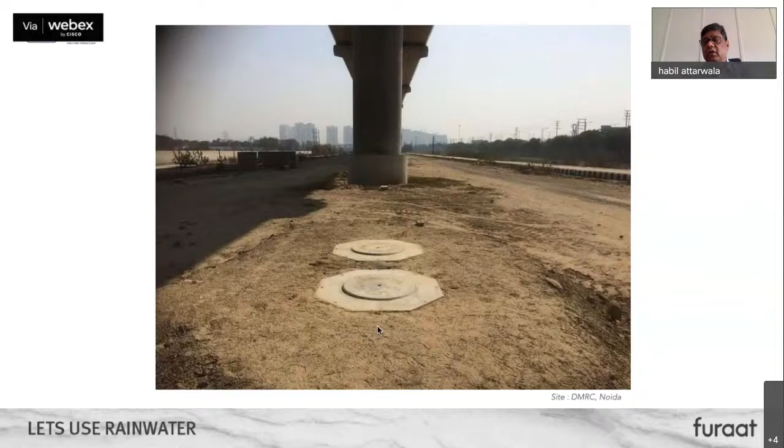We maintain all these units, so I can say it is 100% a fully sustainable project. At any point in time, if you are passing through it, it is now well covered with green area. This is a very early photograph which I had taken, but now they have a corridor, and all the units have a nice landscape around them.

Recently we completed, as I told you, Dahod Smart City, 135 locations. Tata Engineering was the consultant, and we suggested to them and gave them the BOQs, because their original BOQs were such that we could not maintain those structures. We initiated the whole thing and they were convinced, and now all the structures are barricaded with lock and key, and we are maintaining them for the next 5 years.

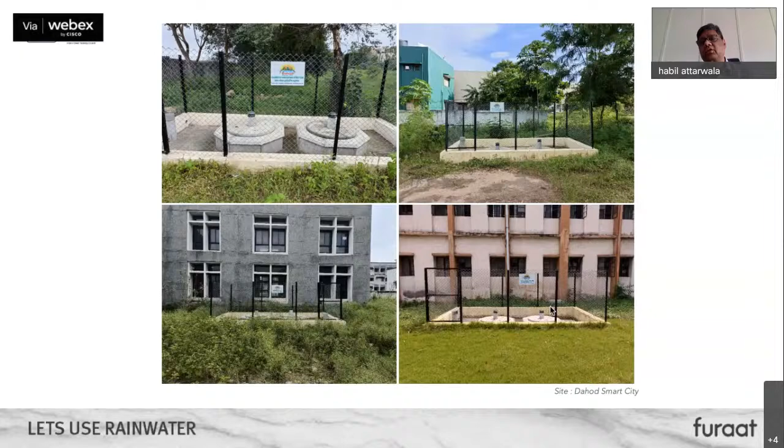Here we are doing a very interesting thing: we are going to have a data recorder, and we are documenting the whole process. We are in talks with SVNIT in Surat, sponsoring the whole program, because we want the data for the next 5 years on what is changing in quality and levels within these 135 structures. We are gathering all this data, and we are also inviting students to work on an internship or full-time. We are open for it.

So these are also our structures, similarly precast concrete. You can take the water in from the horizontal way. There are gravels inside, and again below that, what I showed you with the 2-cylinder unit, it gets filtered. So when it is from the surface, you can just put a unit above it.

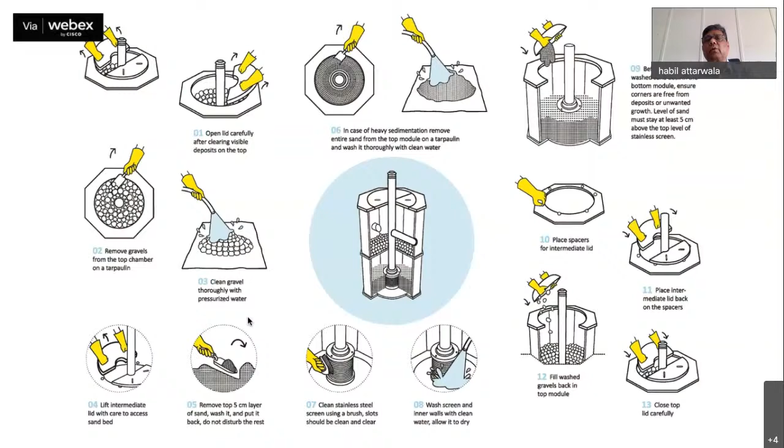All our products are certified Green Pro, and we try to be more sustainable in our production also. We think about the green points too, whenever it is to be transported, we think about the maximum transporting facility within one truck, how it goes. So we have all the illustrations for the maintenance also, and we instruct our clients that they should maintain the unit. If they require, we give the services also for the maintenance.

Recently we just completed ONGC, Nestle, and these are all big projects, based on our past work done with them. Nestle, we are doing all over India, so we are associated with them for the last 15 years. Gandhinagar Municipal Corporation, we did for GIDC electronic zone 12 years ago, and based on our units functioning throughout the last 12 years, they invited us with our own BOQs. We already completed 71 locations last year, and this year again they have tendered another 50 locations.

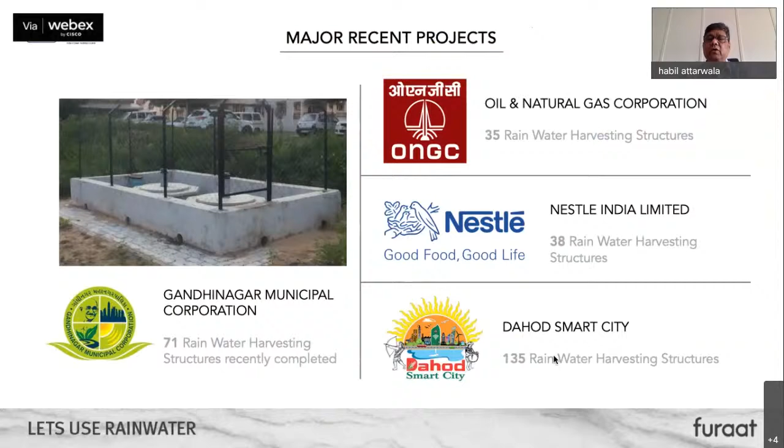Similarly, Dahod Smart City, as I explained, and we are working on a couple of projects also with Tata Engineering, but it is in the pipeline and we are working on this. These are our clients, so you will see all our clients are from different backgrounds. We have catered from the car industry to dairy, pharmaceutical, food industry, paint industry, this is a glass industry you can see. So we have all kinds of clients, from a single house owner to a major city. We have catered to them, and this is only possible because we have standardized everything, and we are focusing on the functionality and maintenance part of the product, rather the structures, so that it is user friendly and can be easily maintained.

2 years back we started a design studio. Dinesh Sharma is a product designer from NID, and he's been associated with us since the inception of this company. This design studio is only dedicated to research and design activities in the field of rainwater conservation, we don't do anything beyond that. We invite students to work, or anyone who is interested in working for the conservation of water, and if they have anything to share with us, we will sponsor the whole thing, and Dinesh will take care of everything.